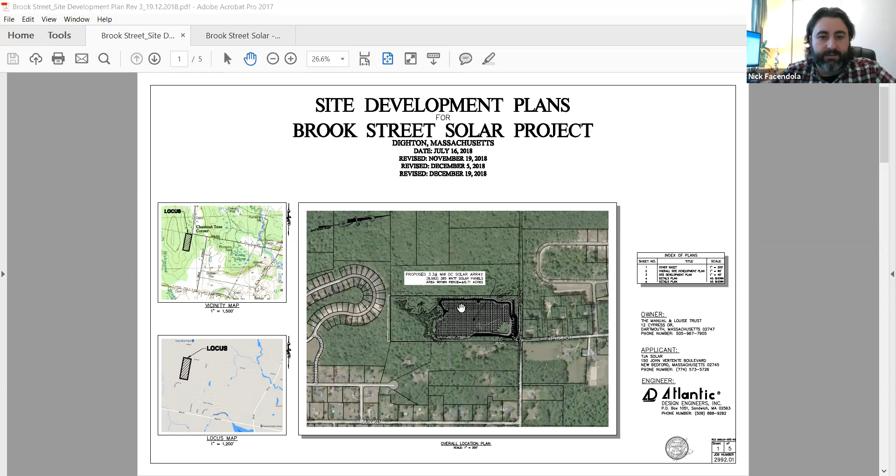So the site is located in this general area. This is Brook Street, and Brook Street ends at the intersection of Pine Street, which turns right. We're right at this corner right here. The development itself is approximately 10 acres plus or minus on a 20-acre parcel. So the disturbed area will be approximately 10 acres, with about 8.8 acres of that being the solar array facility, and the remaining disturbance for site grading, stormwater basins, and gravel access driveway, which enters the site over here at Pine Street and comes up and around and loops around the back here.

The gravel driveway area is about a half acre, so we got about 22,000 square feet of gravel combined with the land disturbance associated to construct the proposed solar array and stormwater basins. There's two main stormwater basins as reviewed and approved by Planning and Conservation. We have a stormwater basin in this area, which accepts overland surface runoff from roughly this portion of the site right here as it kind of breaks. There's a natural grade break through here.

And the remainder of the surface runoff comes down this area right through here in this basin near the property line on the easterly side, collects that stormwater, infiltrates that runoff. These are both infiltration basins with overflow outlets that are directed towards this area along the natural existing flow pattern, and in this area along the natural existing flow pattern. We have a large BVW in the back of the site, which we're maintaining about a 50-foot no disturb zone to where we can, as approved by the Conservation Commission.

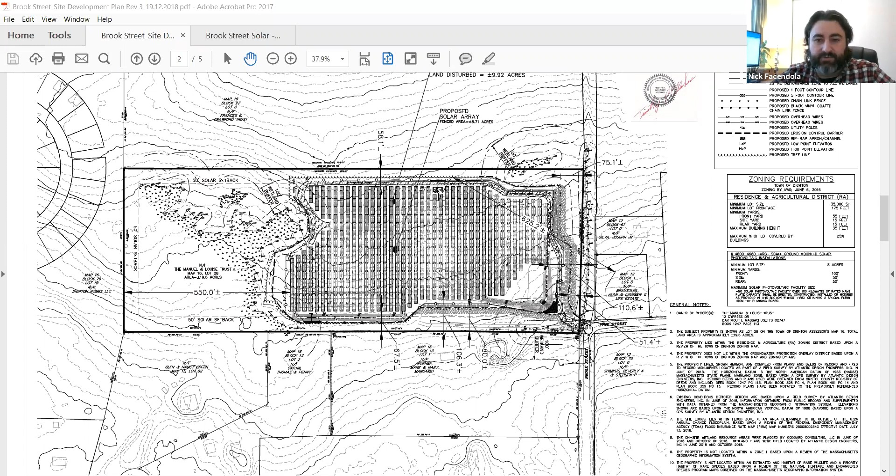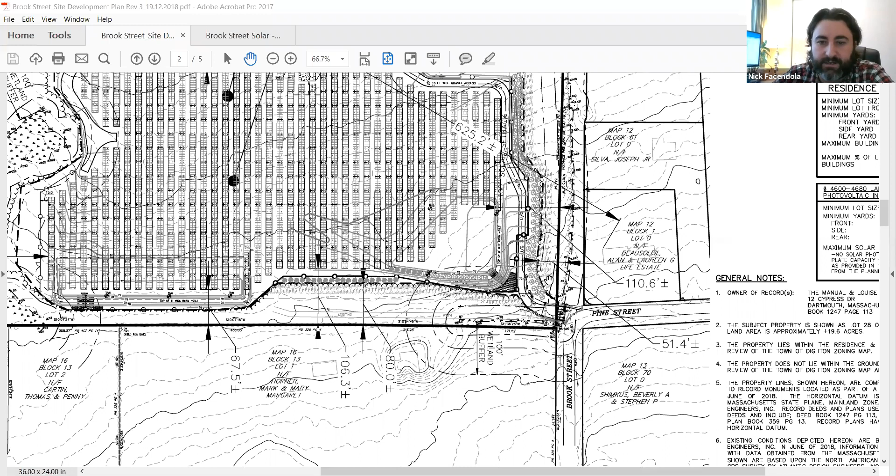There's an isolated wetland located in this area. And there's essentially an isolated wetland with intermittent stream, which runs down the former right-of-way of Brook Street up through here. There is an approved box culvert style crossing in this area right here to cross the unnamed intermittent stream, which runs through this wetland. Erosion controls are proposed along the bottom of the slopes surrounding the proposed project. They run roughly in this area right through here, down through here, and up along the back of the site along the edge of the BVW.

What's been approved is an 18-inch mulch sock, which is a very heavy duty form of erosion control. Most mulch socks that you see are typically 12 inches. So that extra weight will help hold the sock in place and prevent any type of sediment from running off of the property. As discussed, Todd kind of went through the initial description. Their initial plan that was submitted in 2018 had a few revisions. There were 2 updates to the stormwater report done by Atlantic to address Todd's concerns at the time.

So, Atlantic did provide the required documentation, and there was a formal written response to comments by Todd. At that time, I believe everything was satisfied, which is why the planning board voted to approve the special permit back in 2018. One of their conditions, which was placed on this project, was no building permit could be issued until the Stormwater Committee reviewed and approved the project.

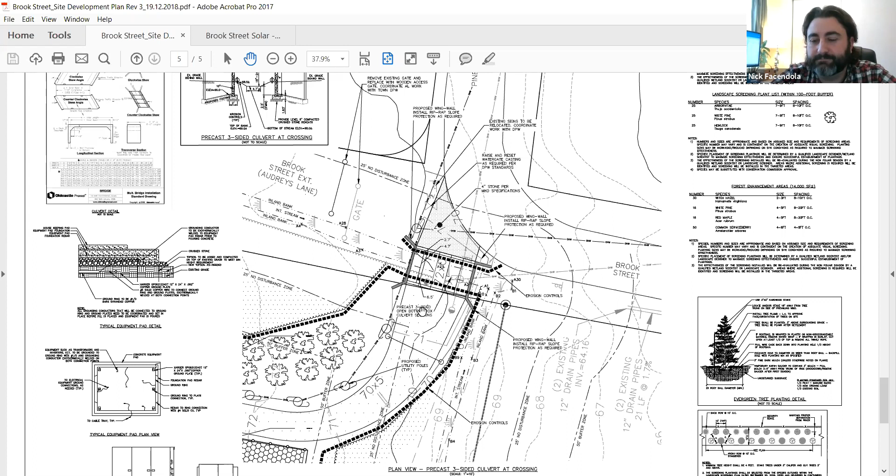So we'll probably go back to that and just ask you to explain that part when he gets here. It's Mr. Tim Rhines, okay? In the meantime, do any members of the Stormwater Committee have questions for Nick? Or wish to comment? Yeah, I do, if I may.

Go ahead, Mr. Ferry. So back to your culvert, I know you're gonna redesign it, and that's probably where most of my interest is also. Along with, I'm to assume you're probably gonna end up moving it to the south a little bit. I'm interested in making sure you're not gonna change the elevation of that apron going into what used to be the right of way. And also make sure it stays big enough, because if there's any damming, it's gonna affect the abutter to the north. So we want to make sure that's going to still receive the water enough, but yet not interfere with any ingress to the solar field or that right of way.

Sure, Tom. So in essence, I have another plan here that details that a little bit further. So the overall size of the culvert, so its capacity to pass water through it, isn't going to be changed. It would be the effective length of that culvert. So the opening of that culvert would remain the same. It would just be reducing the length of that culvert, which is shown here in blue, from 25 feet to 18 feet. That way, that allows us to keep this utility pole in this area right here. National Grid would have to re-guy this pole to likely a new pole in this area, but overall it seems like a doable situation for National Grid in order to keep that pole.

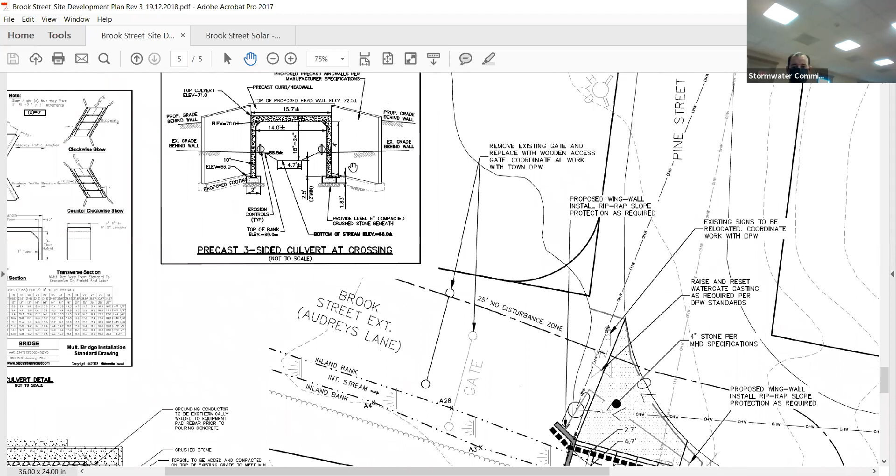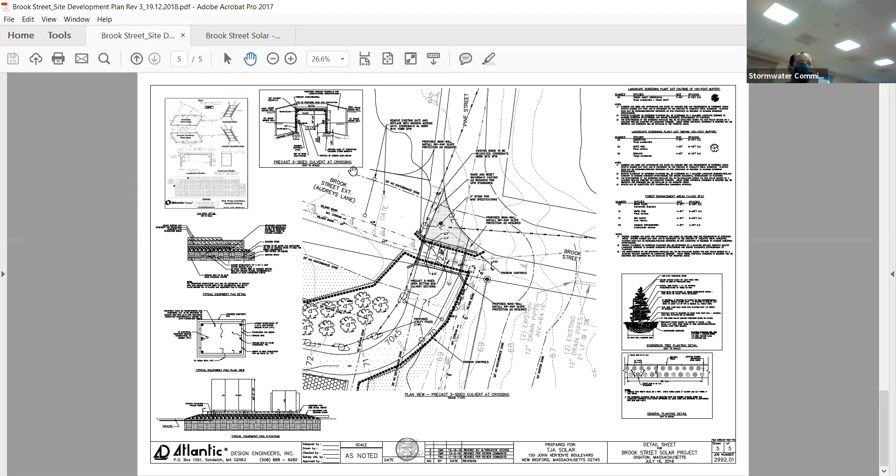No, those are going to be essentially screw-mounted supports. So typical racking panel system for these solar panel arrays. It's a screw-mounted racking system with 4 connection points to the ground, and those hold about 30 panels each. Okay, so we'll have limited spoil activity, because I'm concerned about siltation runoff. I know you've got the 18-inch berm, but there's a lot of wetlands in this area, so I want to make sure we're dealing with the silt runoff. There's going to be a lot of borings in the site.

Correct, and we'll make sure to keep up on the inspections as required by the NPDES permit, which will be filed for this site, and the stormwater pollution prevention plan. So there'll be bi-weekly inspections at a minimum, and after every storm event over 0.25 inches of rainfall. That will all be monitored by Grasshopper's selected general contractor for the project. And if there are additional stormwater and erosion control measures needed due to excessive siltation, we'll definitely add those at the time. And I'll be overseeing the construction and helping those guys navigate any possible issues.

So if there is an area that's seeing excessive concentrated flows or runoff after storm events, after the site's been cleared, we'll make sure to install additional erosion controls in that area, or some type of temporary berms or dikes to slow that water down as it travels through the site. Okay, yeah, I'll be out there obviously with the building permit, so I'll make sure I report back to the stormwater agent. If I see anything out there that we're concerned about, we'll address it at that time. But I just want to make sure you have a plan in place. Thanks. I'll defer my other questions until the planning board gets here.

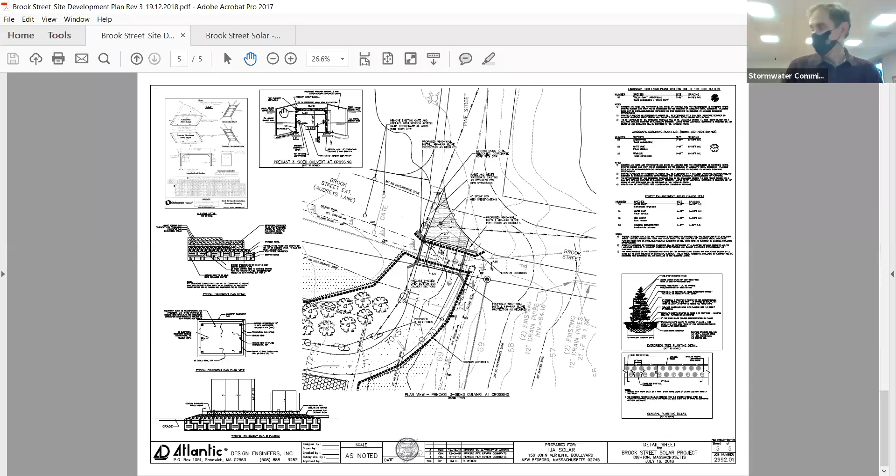And that channel itself is very narrow, a couple feet wide and a couple feet deep. And the proposed culvert, to comply with the state standards for openness, is 14 feet wide and is about 5 feet high. So it's a very large culvert for a small channel. It's essentially bridging that channel. So these two footings are going to be installed on the outside of the banks of that channel, and this three-sided box culvert is going to sit on top of that. And with the openness that's provided, there's no possible chance that this culvert is going to impede the flow of that small, narrow channel.

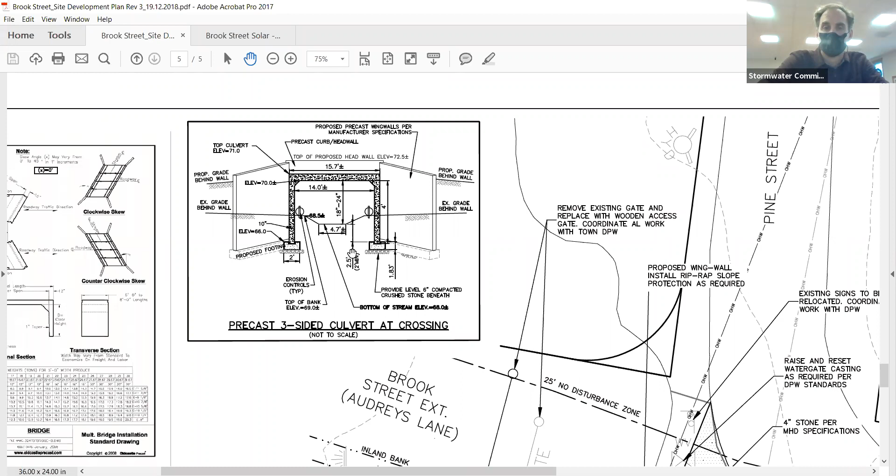Well, in a heavy rainstorm, will the water continue to flow down Audrey Lane, down Brook Street? Correct. That flow path is going to remain exactly as it is today. Okay, is the north side of your project, whatever that boundary is, is there some kind of vegetation or something else so that if it's bigger than the 10-inch rainstorm that I remember was the worst one a while ago, there will not be erosion caused by an overflow from Audrey Lane over to your property, so that there would be erosion and wash away and more mess on Brook Street?

I don't believe so. As detailed in the stormwater report, the proposed flows are less than or match the pre-existing flows, the existing flow today. Right. No additional work is being done to this channel to increase its capacity or make any additional modifications, as we don't have rights. We only have rights to 20 feet off the edge of our property, as this portion of the right-of-way has been abandoned. So there's no proposed disturbance through here, and we're not changing this flow path and capacity of this swale as it exists today. The water comes down through here and travels in its natural flow channel as it does today, and that's going to continue to happen after the project is built.

I understand that. My only concern was your north boundary. Is it sufficiently south of Audrey Lane so that if we got a gully washer on Audrey Lane, there is enough natural protection of your north boundary so that there would not be erosion? So are you speaking of this boundary or this boundary here? I'm not saying battery, I'm saying boundary. Yeah, but he wants to make sure you're referring to that one, along Audrey Lane. Audrey Lane, your boundary on Audrey Lane would be your north boundary.

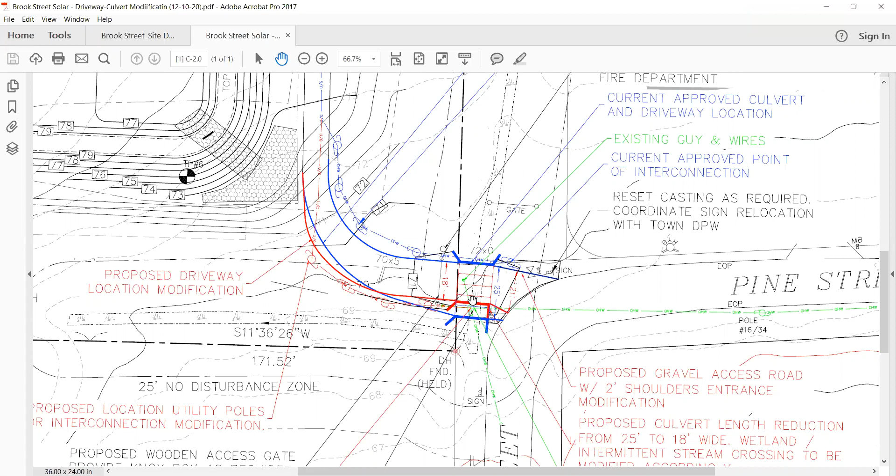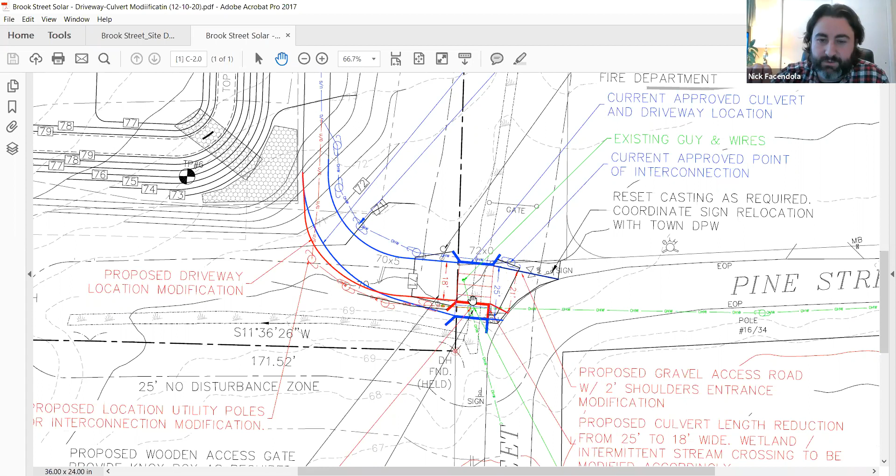So, timeline wise, we submitted for a stormwater permit, and then we've been going back and forth with National Grid trying to work this situation out. And it's kind of come to the point where they're asking us to go to the town to make this minor modification. That worked out last week, which is why the plan was submitted to the planning board last week. So yes, you are correct. The plan that's before the Stormwater Committee doesn't include this proposed minor modification to the driveway entry. But overall, there are no major modifications to the stormwater management report, site hydrology, or anything of that nature.

It's more or less an access and configuration modification to the entry, which needs to be looked at by the planning board, and proper reviews need to be done to make sure emergency vehicles can enter the site safely and that proper access can be had through that area. But as far as site hydrology and stormwater and constructability of the project with regards to erosion controls, the minor modification of the entrance doesn't change any of that from the approved plan.

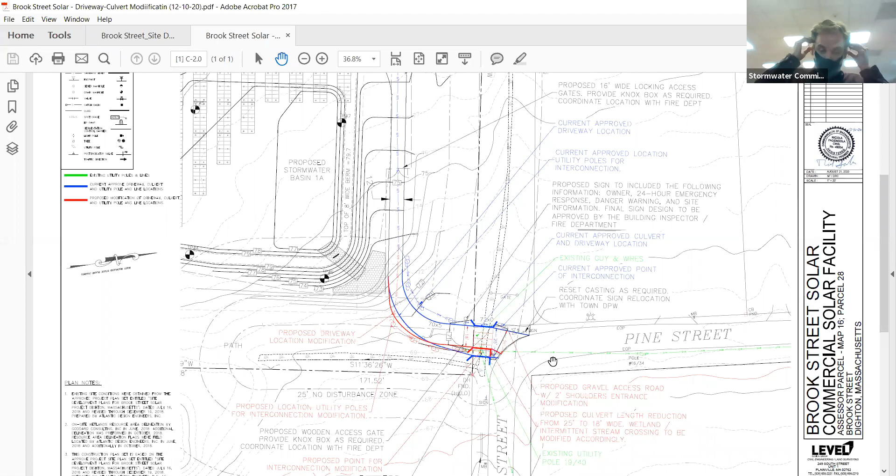So I think what everybody's trying to say here is that the planning board's getting it correct with this. We're looking at it. We got to do a site walk. We should do this once in one revision to make everybody happy: fire, highway, building, stormwater, planning board, and conservation, and just get one revision to get it all correct. So Mr. Rhines, you all set? Yeah, I just have one more question to the applicant. This is for my own needs and purposes.

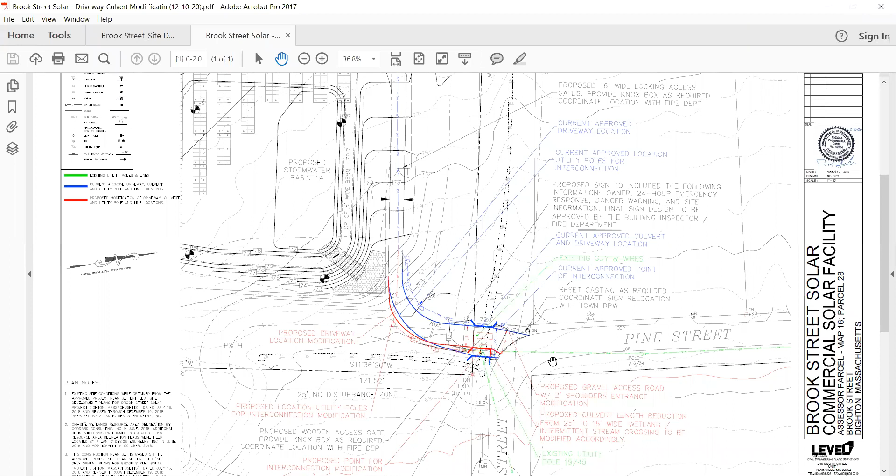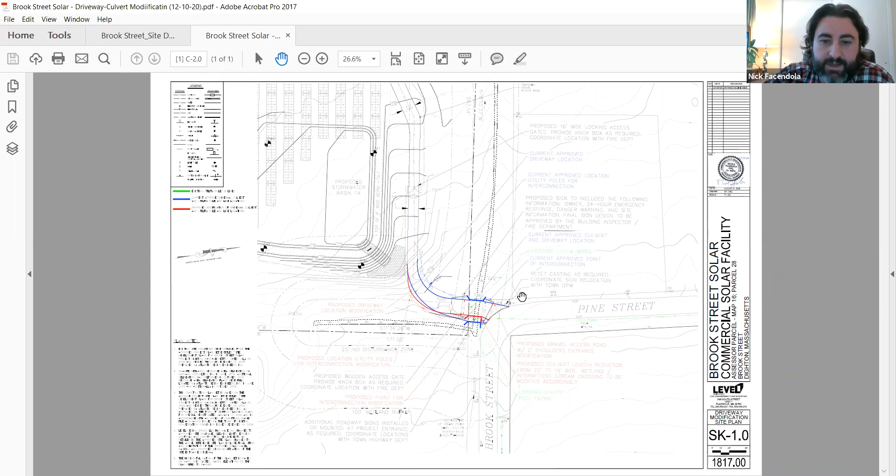Is the abutter to your southeast granting a right-of-way on this property for your driveway repositioning and access? Right here in this area? Yes, southeast. No, the position of the driveway and this final configuration does not require any disturbance within that abutter's property, specifically the additional land granted to them from the abandonment of Brook Street to the center line of that road. So there are no easements required from any abutters. That's what I thought, because of the abandonment, and it draws from the middle of the road. Thank you. I have no further questions, Madam Chairwoman.

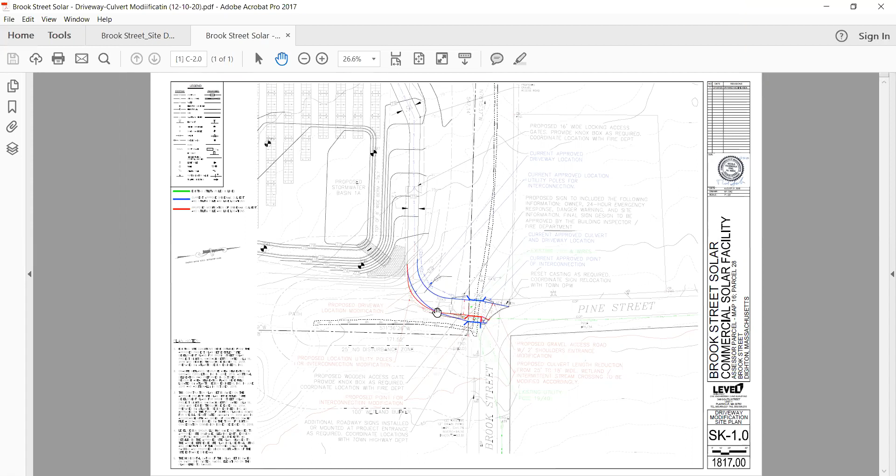May an abutter speak? What we're going to do for this is, since there's more than one, if you would just raise your hand, and when I call on you, state your name and your street address, and then you can ask your questions or comment. So who wants to go first from the abutters? Oh, Bruce Clark's got his hand raised.

Mr. Clark. Yes, Bruce Clark, 1870 Buck Plain Road, here in Dighton. Couple just quick questions. When the Stormwater Committee does have their walk over the property, and it sounds like it's in your plans, can the abutters be a part of that and be notified so we can walk with you? Is that appropriate?

In all honesty, I don't believe you can enter private property unless the developer allows that. A committee of town officials is one issue, but private citizens entering that property, even as part of a site walk, is usually not allowed. So that's something we can check with the developer when we get a date set. But again, I can't guarantee you'd be allowed to go on that property.

Okay, I understand. I know in some real estate transactions, you have abutters walk the property with some of the committees. And that was the reason for my asking. I certainly can look over my property line and get a good view of what's going on without entering the property. No discussion while we're there. There won't be any discussion while we're there. We're just walking it and making observations. There'll be no discussion by the Stormwater Committee. Sure. That's fine. Do you have anything else, Mr. Clark?

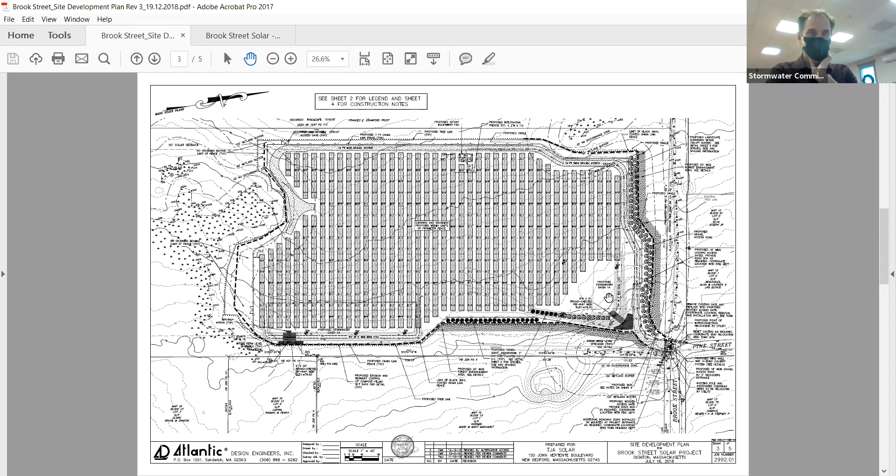Is there anything else? Nick, I've got one question. What you're describing as a pond, is it really a basin that's going to drain and would only have water in it for a certain period of time? Or are you really creating a pond? No, there's two infiltration basins. I apologize about the language used. These are infiltration basins. They're designed with an infiltrative capacity at the bottom of the basin, so water will be seeping through the basins. I know what an infiltration basin is. But when you said pond, it was like, whoa, wait a minute, what's that?

Okay. Does anyone else on the committee wish to comment? I think it would be prudent to do a site walk. Okay, so let's lay out the next steps, because it looks like it's going back to the planning board anyhow for a minor review or whatever they consider. Mr. and Mrs. Beausoleil, I will just say to you, we get a gully washer, there is still going to be water running on Brook Street like it does now from Audrey Lane. This project is not going to impact that. That's a natural flow when we have a gully washer. So unfortunately, this project isn't going to slow it up or deter it or add to it. So I just want you to be aware of that.

Well, thank you. That was a big concern that any of this would interfere with that. I mean, we've lived here 40 years. We know what it's like over there. So we just don't want it worse. I understand, but I don't want you to go out of here thinking this is a cure-all for the flooding that happens on Brook Street when we really get a bad rainstorm. So, Mr. Pilling, you want to outline the steps we're going to take next?

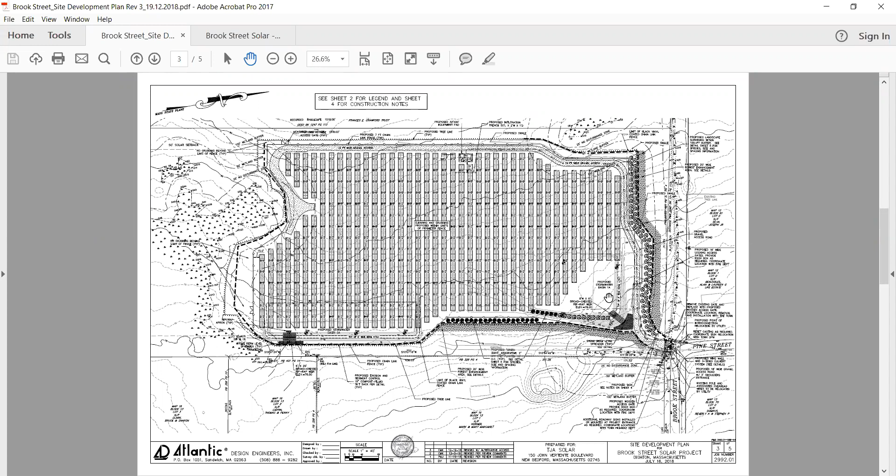Yes, go ahead. One point, Chair, we haven't named the date yet, but I just thought of something. I would like to ask Mr. Clark if we could have permission to enter through his property to see the south side of the array instead of walking however many feet in a foot of snow when we get out there. So if he wouldn't mind granting us permission, that would be wonderful.

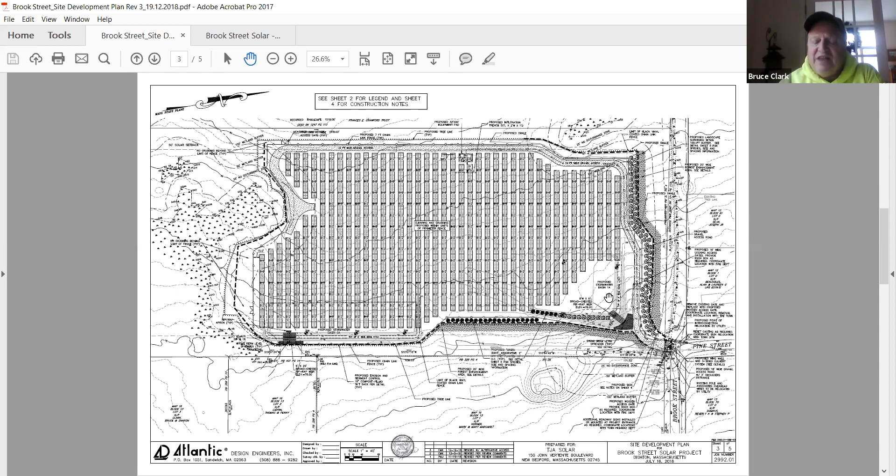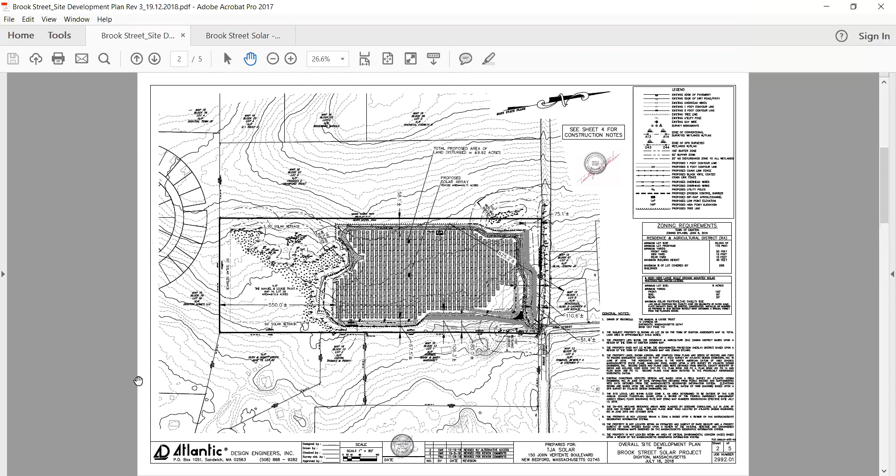Did you hear me, Mr. Clark? I'm sorry, could you repeat that? I think I got the gist of it, but just repeat it again. Sure, no problem. I was just wondering if the board or the committee could have permission to enter the south side of the array through your property, instead of walking however many hundred feet in a foot of snow. Yeah, there's probably about 100 feet between my house and that property line, maybe a little more, but if you need to access it, you're welcome. That'd be great. Thank you very much.

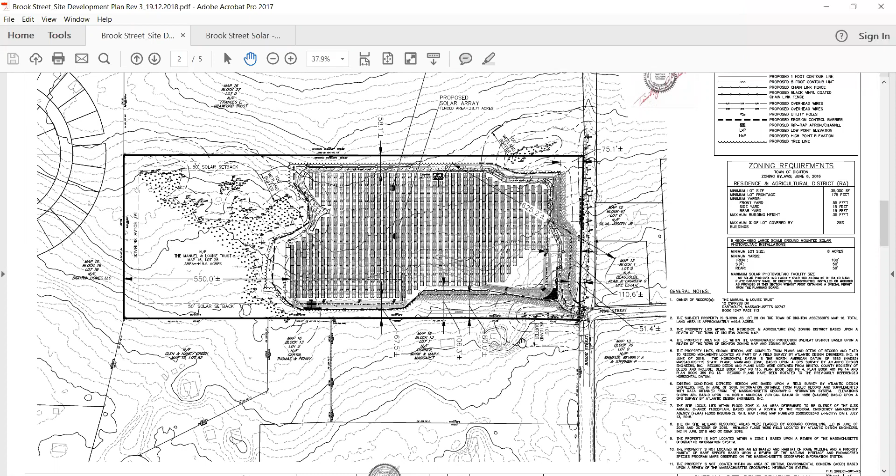Madam Chairwoman, before we wrap things up, may I make a statement, so maybe Mr. Pilling could agree with it. In regards to Mrs. Beausoleil's question about the grass strip on the north side that almost abuts her property, I believe that once grass is installed there, you're going to have more absorption into the soil itself, so you're possibly going to have less water runoff from the steep slope leading back down toward Pine Street and Brook Street. Am I correct in saying that? Wants to respond.

And I'm going to refer everybody back to Chairwoman Goulart's comments, that this is not going to take care of the pre-existing problem on Audrey Lane. But it's the charge of this committee to ensure that no additional runoff worsens the situation on Audrey Lane. And you can be sure that we're going to do our diligence and make sure that doesn't happen. We're also going to make sure that all of the infrastructure, on private or public property, is maintained according to plan. And those are all state regulations. So with that, I yield.

Billy. Yeah, obviously we are cutting down trees and putting in grass, but the way that area is, it's directing it into this drainage basin. And most of it is being infiltrated. There is some that's running out, but the pre- and post-development are unchanged after the project is completed.

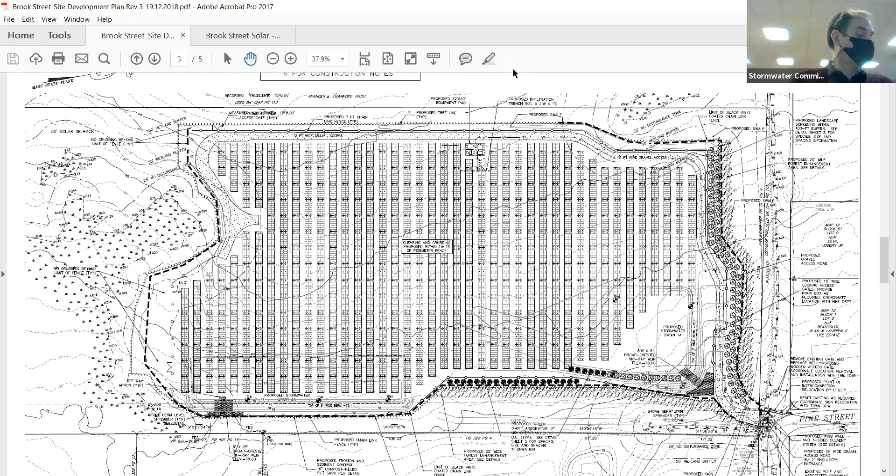Yes. Yep, good with Mr. Fournette. That's a Wednesday. All right, Mr. Pires is okay. I'm okay. Mr. Aguirre is okay. I'm also. Yes, okay. Mr. Rhines? Yes, I'm fine with that. Mr. Fasendola? That'll work, yes.

So now we got to pick a date for our next meeting. Is a Wednesday okay for you, Tom? Yeah, Wednesday's pretty good. How about the 20th? January the 20th at 1 PM here. Yeah, Monday that week is Martin Luther King Day, but Tuesday the 20th works for me. No, Wednesday the 20th. Oh, sorry, Wednesday the 20th. Yep, Mr. Aguirre is okay? Pires? Mr. Fournette okay? Mrs. Goulart? Mr. Ferry? Yes. Mr. Rhines? I may possibly be in Washington DC on my birthday, which is the 20th.

I think the planning board input's important at this meeting, so. Well, the Thursday, the 21st, when are you coming back? If you go? I believe that we're just going to boogie down there and do our thing during the day and drive back the same night, I believe, because I have a planning board meeting at 6 PM that evening also. So would that Thursday, the 21st be okay? No? Oh, okay.

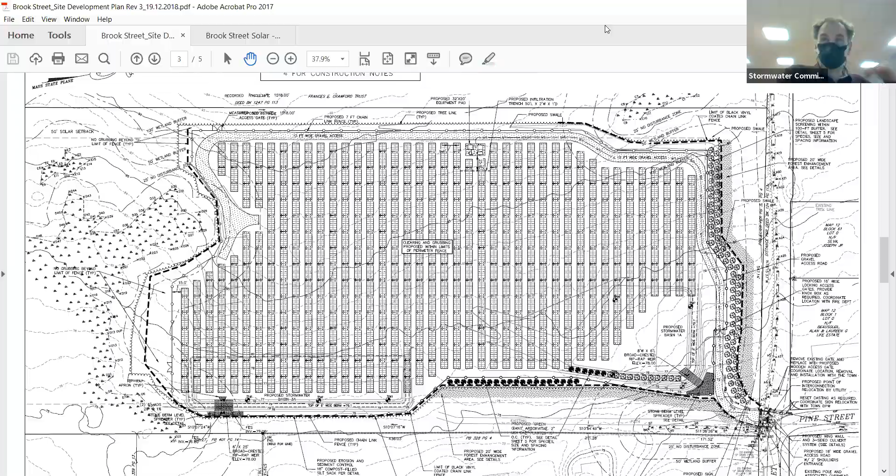Yes. Thank you. Okay by me. Mr. Fournette? Mr. Fournette's okay, Mr. Pires is okay, Mr. Aguirre is fine, I am fine. Mr. Rhines? Mr. Pilling. Mr. Barry? I'm all set. Yes, I'm fine with that. So that works pretty well. So then, oh, go ahead.

So while we're talking about things we have to get clarified, whether it's the planning board hearing this again or site walks and so forth, there was a question raised about who owns the land where the culvert is. And there was talk of an easement, if it's town of Dighton land. So that's got to be resolved, because quite frankly, as a selectman who would have to vote on an easement, I can't see me sitting here as chairman of the Stormwater Committee saying, let's move ahead with this when I don't have an answer on the town property.

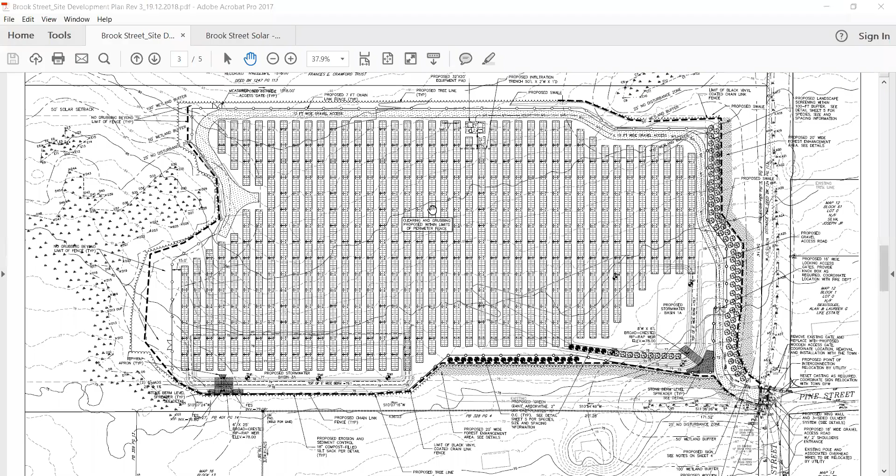So, Nick, there must be a plan showing boundaries and who owns what. Yeah. I believe this was reviewed during the special permit process, and a driveway modification was made late in the approval process. So the town owns the section where, I can put the screen back up. Let me get to a better page here, zoomed in. So the property line is right here. The town owns everything in from here, and if you extend this line straight down, that's where the town owns to.

And then with the abandonment of Audrey's Lane, the project proponent owns to the center line, which is 25 feet, and the northerly 25 feet is owned by this abutter here. So all the work and disturbance is either within town right of way to provide access to our site, or within our 25 feet of the abandoned right of way. So the answer to my question is yes, there is town land involved. Correct, just as any driveway requires the crossing of town land.

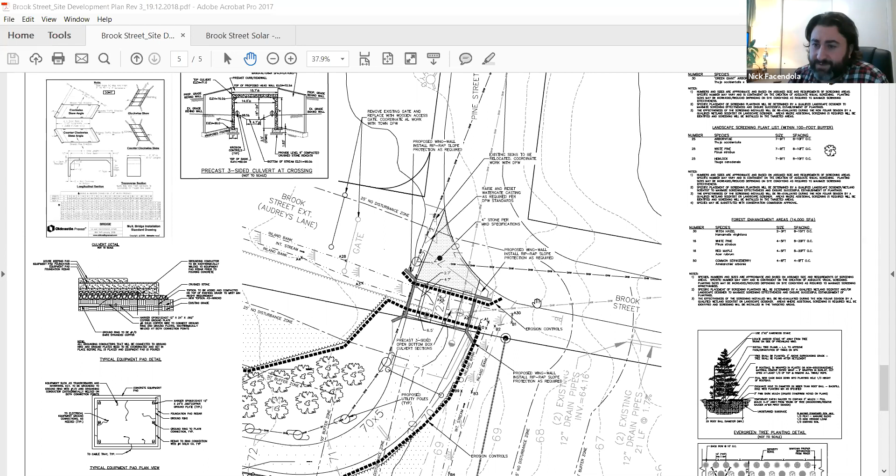I don't know the legality. I can check with TJA to see what discussions were had, if an easement was required. I don't believe easements are required for access, but that's something I'd have to follow up with TJA on, and I believe their attorneys would have had that discussion in 2018. But I think we're also talking about the easement going the other way so that you can maintain the culvert without us doing it. Oh, okay, agreed. If there's an easement for us to do perpetual maintenance on the structure, then yes, something would have to be developed and approved by the town. That is correct. Right, and I believe we're all on the same page now.

And to answer the chairman's question, it's not just a driveway, but the driveway permit should satisfy what needs to be reviewed, especially with a new plan that's going to be created for the culvert. I'll have to follow up with TJA and see what discussions were had back during the original time of permitting. I apologize, I'm not up to speed on every aspect that was discussed during that time, but that's one of the items I will look into and follow up with the committee on. Ed?

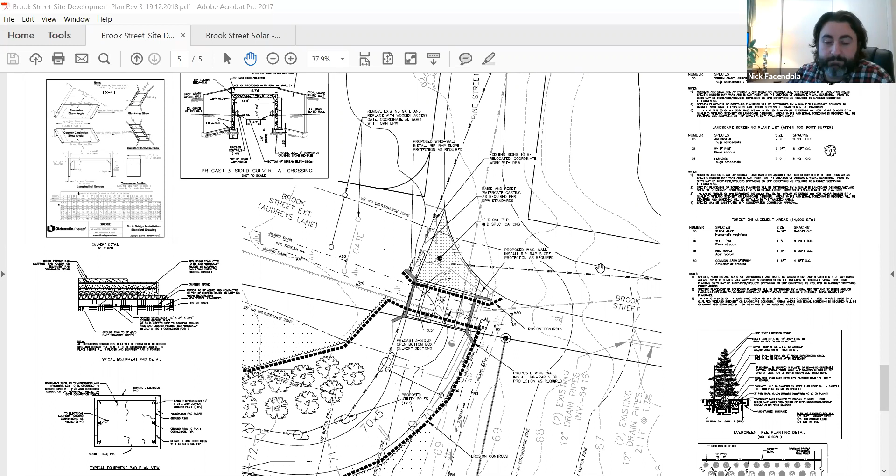Yeah, the driveway permit, you broke up a little, but the driveway permit covers the curb cut access off of a public way. What it does not cover is the work that's going to take place in the public way for the installation of the culvert. And as Agent Pilling said, it does not cover the ongoing maintenance that's required for that said culvert in a public way. So that's what needs to be answered. And the selectmen obviously are going to follow through and find out.

Yeah, Nick, if you check with whoever you have to check with, I will check with town counsel. Mr. Ferry and I have done many easements in town. Town counsel obviously will weigh in on this, and between what you find out, what may have been discussed or whatever, I will find out from the town side what has to be done, because at a minimum, I would think this has to be voted on by the Board of Selectmen. There would have to be paperwork drawn.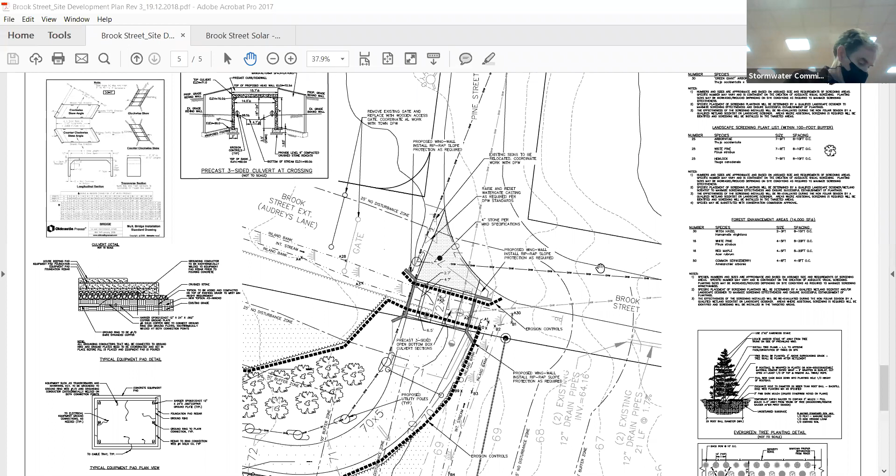If it would seem it's a permanent easement, which means it has to be recorded at the Bristol County Registry of Deeds, and so on. So there's a lot of detailed red tape. So if you do what you can, and I will check on our end, and we'll get this information together and figure out what's the best way to go. Sounds good. I appreciate your efforts, and I'll communicate everything I receive and find out with Mr. Pilling. Okay. Mr. Ferry, does that work for you? Yes, thank you.

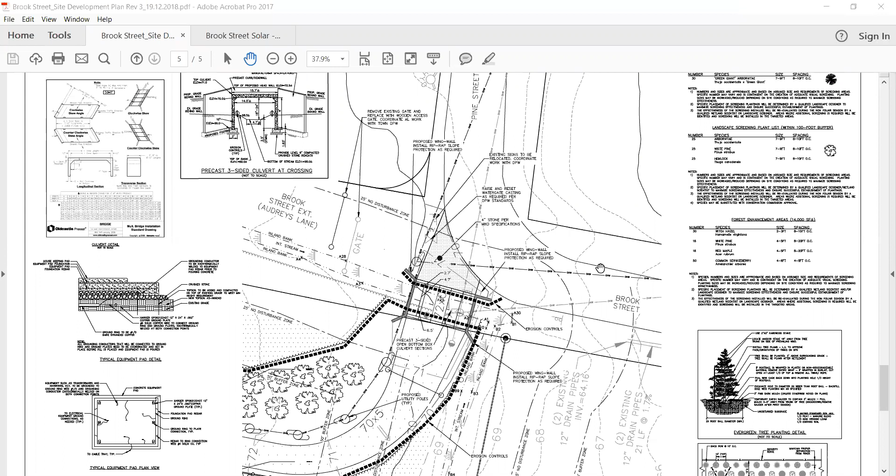Okay, Mr. Pius. No, I just want... Nick, you can stop sharing your screen. Oh, I'm sorry. I was on the planning board at the time this originally went through, the special permit. And I'm pretty sure that Mrs. Easterday has some relative information to that area that's in question, except for the culvert, I believe, is on our property. But as far as Audreys Lane and all of that area, there was a decision by town counsel at that time about who owned what and where it was going. So I think Mrs. Easterday would be a good resource.

Okay, I'll check to see what Mrs. Easterday has, because I'm still going to take this to town. A first for Mr. Ferry and I, as far as the nature of it and what is happening. So we'll check it out, Nick, and we'll share the information with you so we all know what we're supposed to be doing and doing it correctly. Okay. Much appreciated. And I'll also follow up with the DPW superintendent and the fire chief or the fire protection officer with regards to the minor driveway modification, just to make sure that everybody's on board with that reduction and get all the proper reviews in place.